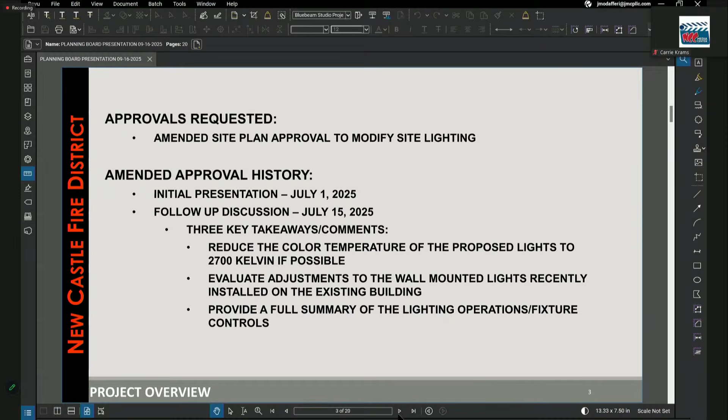Can you tell us what we had approved in terms of the number of lights for the site at that point, including the extension? The number of lights, so this plan included I think it was 7 or 8 pole mounted lights. The number of pole mounted lights has not changed since the previous approval.

We had 3 lights above the truck bay doors facing Memorial Drive, 1 light facing King Street above the truck bay doors, 2 lights mounted on the wall at the front along King Street for the proposed expansion, 1 proposed light over the existing truck bay of the existing building. Actually 1 proposed light over each of the existing truck bays, and then 4 lights over the back on the existing building.

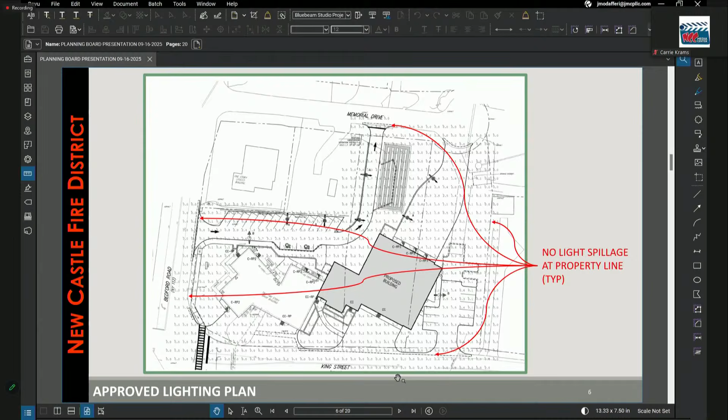So 1 here, here, here, and here. And then when we came before you in July, we had the amended approval where we had proposed some lighting amendments.

That included some lights that were now existing on the building that were installed after the start of construction by the fire commissioners. And those are 5 lights along the back of the existing building here.

We also incorporated some lights on the building here at the man door entries, and then I guess another light here at the man door and another one here at the man door, as well as we made 3 lights at the truck bays on King Street, as opposed to one that was there before.

We also proposed not to modify any of the lights along the front of the existing building. Basically, the existing lights on the firehouse would remain. The result of this plan was that we had some minimal light spillage at the back of the property here facing the utility substation, and then a little bit of light spillage on Memorial Drive here.

So if you'll recall, one of the other changes we made was the pole-mounted fixture that was approved in 2016 is no longer available now with the cutoff on the back at the property line. So if we installed the previously approved lights, we would have spillage over the property line from the back of those because the mechanisms in the fixture that we proposed was no longer available.

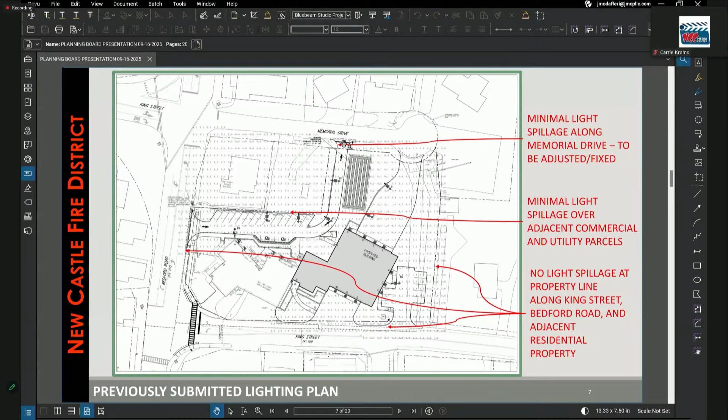Which light was it? Which pole mounted lights? All of them? All of the pole mounted lights, so we switched from the approved flex style light to a more utilitarian shoebox style that you see on other sites such as the Walgreens across the street.

I need to sign in, there we go. Still here, good.

The major part of the adjustment was that, did I lose connection to the Zoom? Looks like you lost my connection. You're no longer connected. Yep, I'm going back in now. I'm no longer connected to the internet at all. What happened here? Apologies. Why do I have no internet? Looks like I'm back in. Open. Okay. Join.

If you can go to the next slide also. And we had, turn this on too. So we previously had these two light fixtures that have now been replaced with this light fixture.

So the light fixture on the top is the light fixture that was installed by the fire district just after construction started. That is the one where, from the face of it, the light shines out as opposed to down. So that was throwing light over the property.

The one that you have there in the middle, that you're pointing to with the blue arrows, is that it's parallel with the ground? Yes. And there are brackets that hold it in that position? Yes, that's correct.

Okay, so it's consistent with the one we were proposing on the rest of the building. But we were going to keep this one and replace that, but although the board didn't say that we had to go to 2700 Kelvin, we also changed the plans to go to 2700 Kelvin across the board. So this fixture at the bottom here was not available in 2700 Kelvin.

So we changed all of the wall-mounted fixtures to this fixture here, including the ones on the existing building. Everything's correct, been changed. So by doing that, that eliminated the light spillage over the property line there.

The only ones that aren't, well, I shouldn't say all of the pole-mounted fixtures, wall-mounted fixtures are changed to that. There are really ceiling-mounted fixtures at two of the doors that have an overhang that will have a recessed light here. And then this light here, the wall-mounted one in black here, is the one that will be placed over the truck bay doors facing King Street.

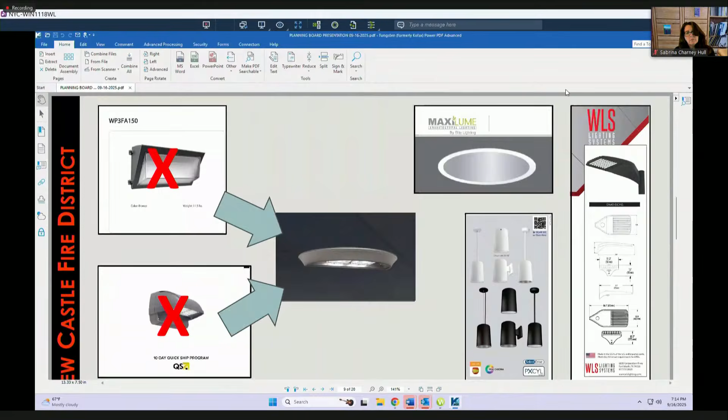So the first one is the B fixtures, which are all the pole-mounted fixtures circled in red. Those are to be controlled by a timer that will turn off at 10 o'clock, going from dusk to 10 o'clock, and then by motion sensors after that for emergencies, if somebody drives through the lot.

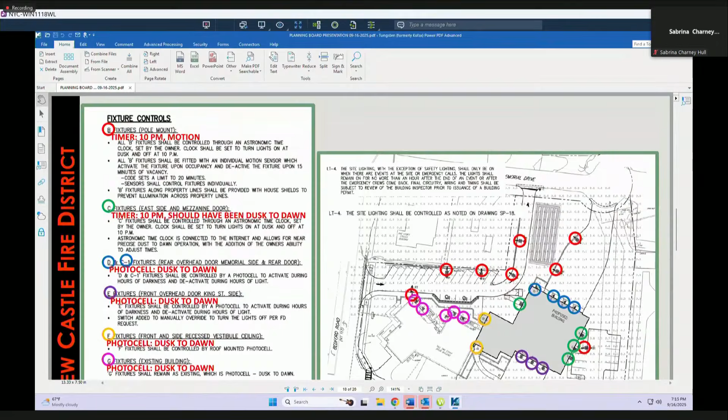Fixture C, which is the lights on the easterly side of the site in the green circles, and the one on the westerly side of the proposed expansion, those are also shown to be controlled by the timer till 10 o'clock on the plans, but that was a mistake on my part. Those are intended to be controlled dusk to dawn, and I'll get to reasons for that shortly.

The D and C1 fixtures on the back of the building facing Memorial Drive are intended to be photocell dusk till dawn, as well as the three light fixtures in purple over the truck bay doors at King Street. The F fixtures, the two underneath the canopies, the recessed lights, again photocell. And the five existing fixtures being replaced with the new fixture we just talked about are again photocell dusk to dawn, just like the ones out there right now.

So essentially, for safety purposes, we've proposed that all of the building mounted lights be dusk to dawn for protection. Now there was a comment from Sabrina asking whether some of the lights could be on motion sensors, specifically the three lights over the truck bay doors and the three on both sides of the building.

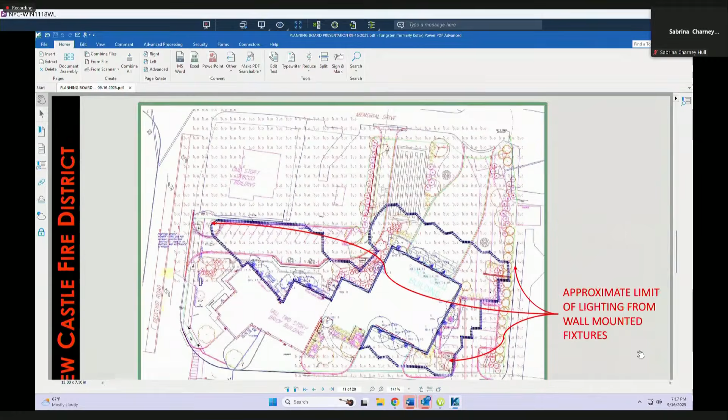So I think that's the next slide, Lynn. What we looked at first is this slide, which shows all of the building mounted lighting currently on the plan. The blue line around the numbers is essentially the approximate limits of the throw of those lights, without the pole mounted lights.

So the closest zero that we had to any of those lights shows where it is today, where we would propose to do the dusk to dawn lighting. If you can go to the next slide, please.

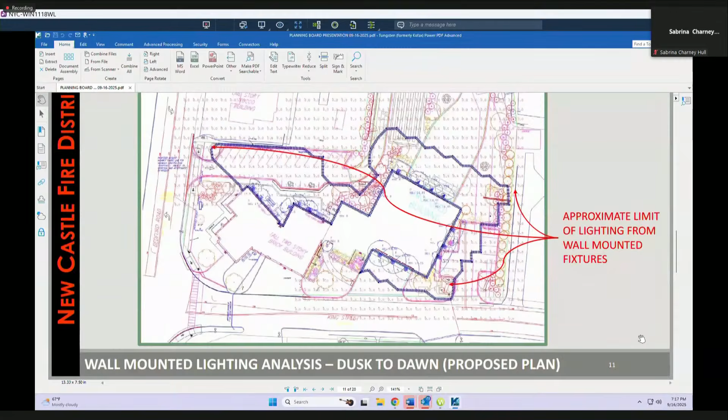So this plan, you know what, leave that one is fine. The plan on the lower right shows where we can take the lights over the truck bay doors and make them motion sensor only, which would reduce the dusk to dawn lights to what you're seeing on the right.

So that's a comparison of what we currently show on the plans and what I've talked to the fire district about, taking the lights over the truck bay doors and making them motion sensors, so they would only come on when somebody walked by them, drove by them, whatever.

Now, all of the lights, other than the five on the existing building being replaced, all the lights on the proposed building that are mounted on the wall in this scenario on the lower right are at man doors where people would walk in. So that's the safety concern for us.

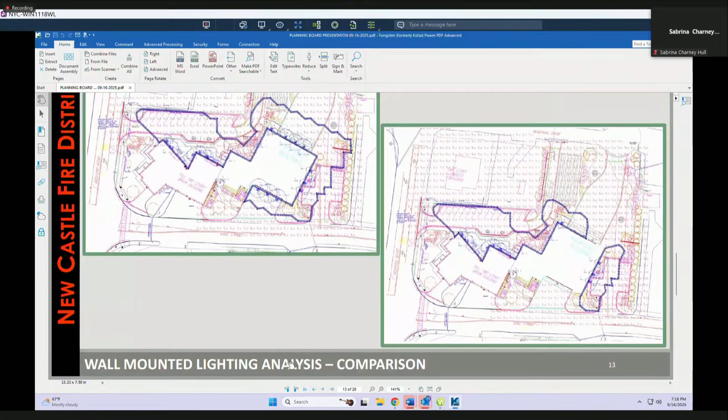We want those lights on dusk to dawn so that in the event somebody needs to get to the door, they can see where it is, they know where it is, they're not walking up to it with a motion sensor. If for some reason the motion sensors don't work, they can at least get to the door and have a light on if they have to get into the building with their key fob or key or however they're going to do that.

And there, for example, three doors on that eastern side, or southern side? Yes, those are actual doors, so we'll get into more of that question a little bit later. Next slide, please. They're mounted at about 8 feet — I believe those are right above the doors, basically.

So we were also in receipt of a comment letter from Mr. Carlock, who's here tonight, and wanted to just go through our responses to some of his comments. If you look at the northwest corner, the existing building, basically where those five lights are that were in question back in July, he made some statements that we want to clarify.

His first statement was that the five high-intensity lights on the existing building are to remain, and these should be removed. Again, that's not a true statement — I just said we're going to take those high-intensity lights and replace them with lower-intensity lights. He also stated pre-existing lighting on the existing building was to be removed as part of the approval. That's not a true statement either; the original design was to basically supplement the existing lights on the building.

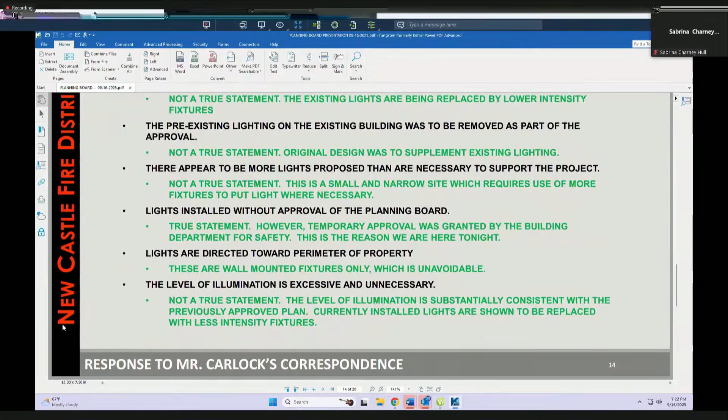This is a transition zone, so I think it's important for us to understand what's going on with these pole mounted lights, and maybe there's some solutions there. Since you're proposing to have these on until 10 o'clock in some cases, I guess one other question would be, what are the lumens on the all-night situation at the site? And then when you have the poles that turn off after 10 o'clock, what do we have between dusk and 10 o'clock in terms of lumens?

Do you have a sample though of the pole lamp that you're gonna put on top of the pole? They were provided with the submission package back in July. Okay, so there's no change with those. No, in other words, no.

As I understand it, they're directional. Yes, so they are directed — there were some comments made about a house side shield, which is sort of a generic, old school term, where with the LEDs it's an internal system that throws the light away from the property line. So all of the pole mounted lights are controlled with that type of system.

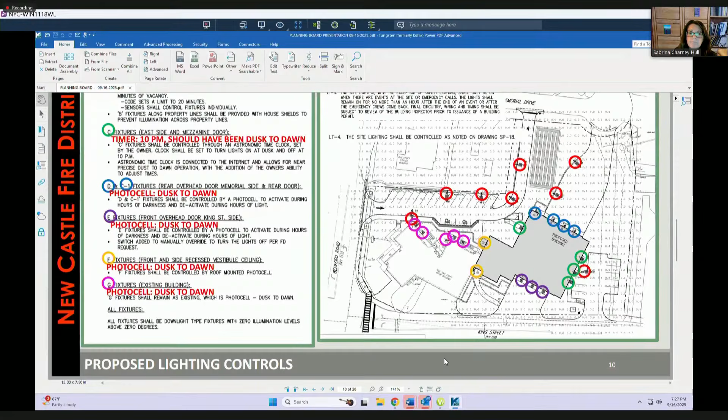Because it's a town-owned easement, we can't put fixtures in it. We can put in curb and landscaping. So your drainage sheet flows out of - have you not seen that? Well, you have a drainage easement, I'm saying you have pavement there, right? Yes. So is the water sheet flowing toward the building, or do you have any catch basins in that corner?

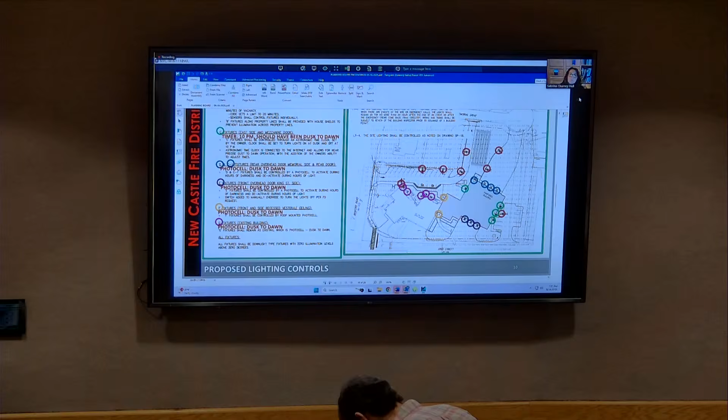Over here, yeah, on the right side, where you have that parking lot that's in the easement. So you already got permission from the town to put asphalt. My question is, for that area, do you have any subsurface improvements different from the mounting needed for the light pole fixture? I believe it's just the town sewer and town storm within that area.

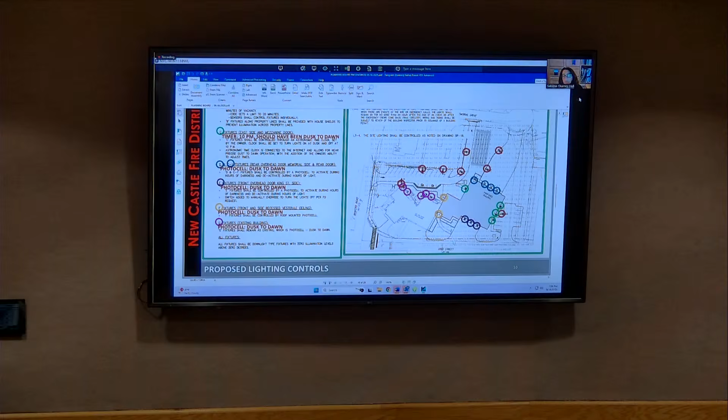I can double check and look, but has the question been asked of the town if it'd be okay to put a single structure in that area? I don't know how deep the line is, but we're talking about a single concrete base. I would have to check the easement - this is Lynn Whiting - but I don't think you're allowed to put anything in it. That was my understanding as well.

So there's a possibility, though it doesn't sound like that question has been asked. That there was - it was asked and discussed in 2016. Okay, I wasn't here in 2016. I understand. Chairman? Yes, Bob? Can I chime in on something here, please? Sure, yep.

It seems to me it's critical if there's a pole there - I would recommend at this point that someone reach out to the Commissioner of Public Works, who makes the final say. That would be Bart Carey, on whether or not a pole and electric conduit could be put in that easement. He's the one who makes the final decision on anything in the town easement, so it might be worthwhile to do that if you feel it's necessary, Mr. Chairman. Well, I think it would be desirable from the standpoint of mitigating the impact.

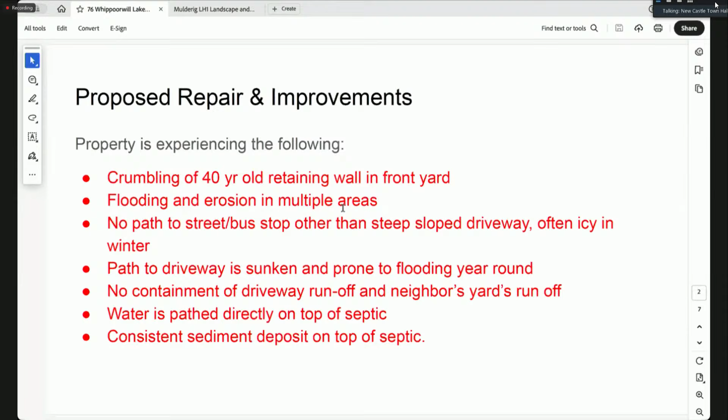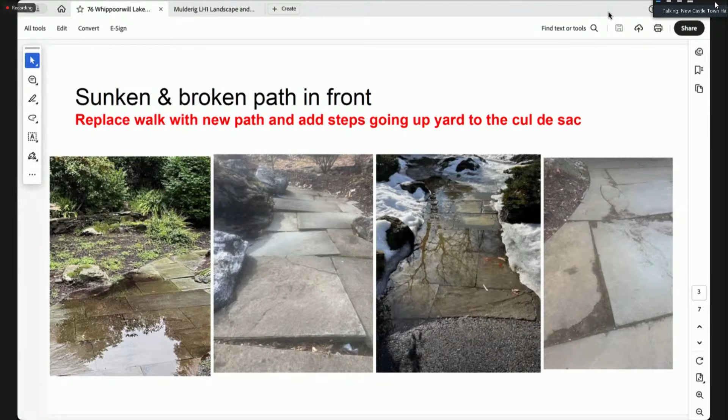There's no real containment for that water that runs off the driveway at all, and it's basically pathed to the septic and then down into the wetlands. So these are just some pictures here - walk, crumbling, sunken, flooding. The wall, which we're proposing to replace at exactly the same height, needs to come down - there were roots pushing in on it, it's tilted forward, it needs to be completely taken apart, but it is all under 24 inches.

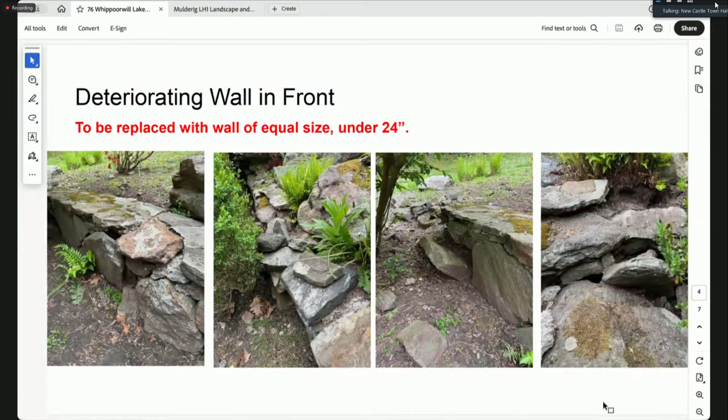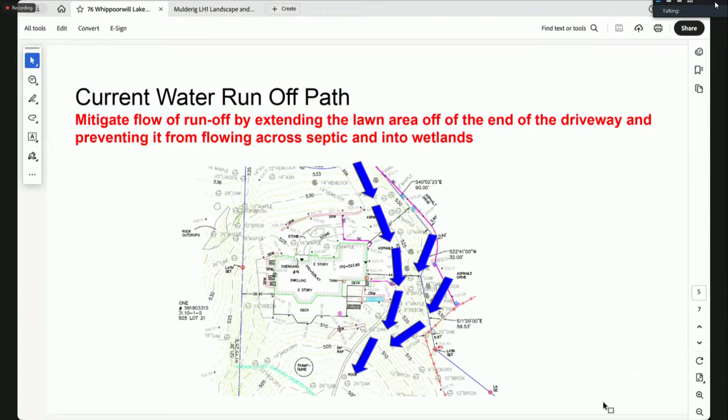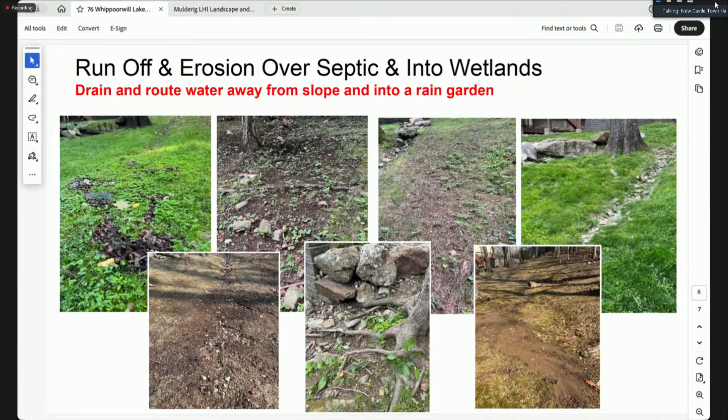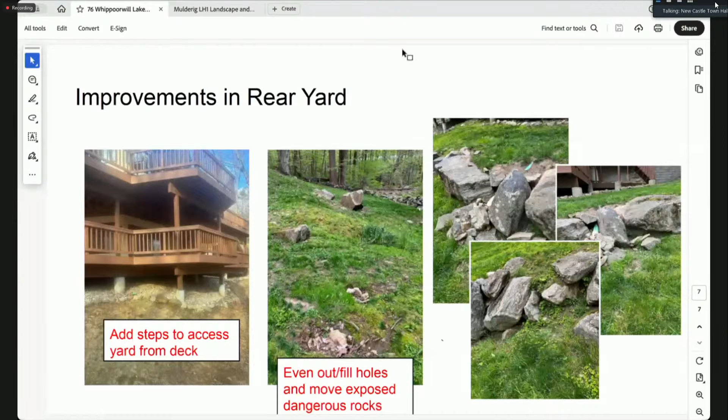And that's a little bit of a summary there. Nick, I'll turn it over to you.

Thank you, Jason. Will I be able to share my screen? I have a set of plans I'm going to show. Yep, I'm not sharing anymore, so you should be able to. Okay, great, thank you.

In addition to what Jason just spoke about, I wanted to bring your attention to sheet C-3 of our erosion and sediment control plans. The improvements consist of adding a retaining wall at the end of the driveway, regrading the side yard area so there's not as much slope, and regrading some areas in the eastern side yard and rear of the yard. We're trying to grade this area so the excessively steep sections become more manageable, aiming for a 3-to-1 slope throughout that steep area.

In addition to that, we'll be providing drainage behind the walls that will discharge to an energy dissipator in the rear yard, which should take away some of the runoff that comes down the driveway.

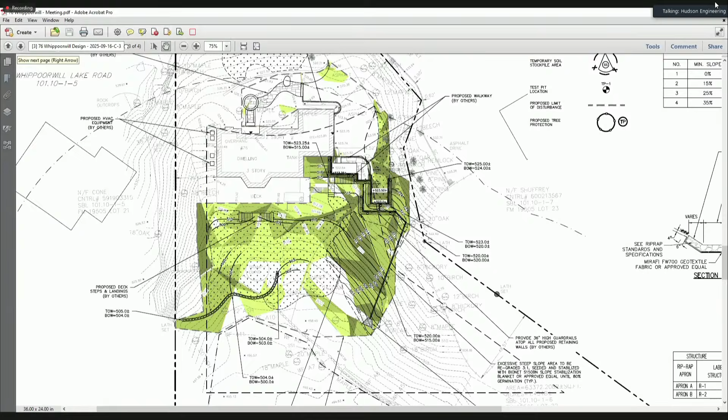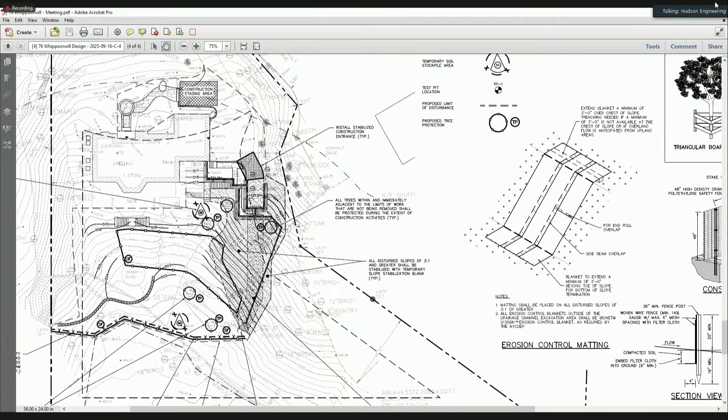As far as access to the rear yard goes, we're going to put a stabilized construction entrance at the end of the driveway, and we'll hand-build a path down the steep slope area to provide access for any material, workers, or equipment needed to complete the work in the back.

Once the grading is completed, we'll implement seeding and install erosion control matting all along this area to help stabilize it and ensure germination takes place. That will also help with some of the erosion that's been happening in the rear yard. So all these regraded areas will be stabilized with matting.

We're providing double rows of silt fence in the rear yard to protect the wetlands just south of the areas of disturbance. We're also showing tree protection, silt fence, and construction fence around the existing septic area so it doesn't get impacted.

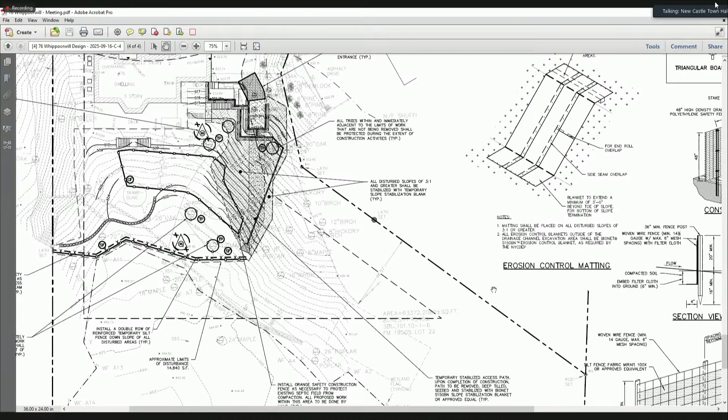That's about it. We did see that we had some comments from the planning board, including comment number 3 regarding the stream segments in the back there.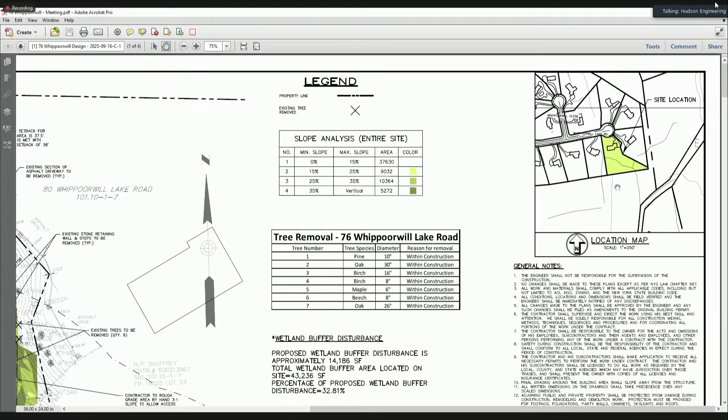So those are not actually streams - the actual stream is this line here in the back of the property. I think we've marked all the wetlands on the property and updated the plans to show the 150-foot buffer for the wetlands, which basically encompasses the entire area of our proposed work.

Unfortunately, there's no way to avoid that. So there is a fair amount of handwork that we are proposing to do to get access to the back and to ensure that we limit the amount of erosion that occurs while we work.

Okay, Sabrina, you had some questions or comments?

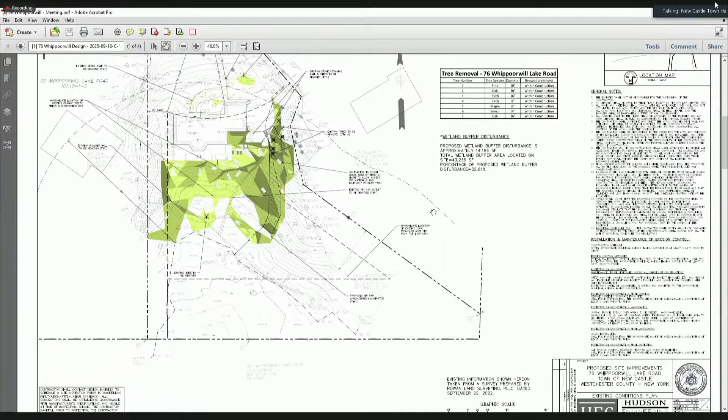Sure. For the board's information, this application is considered a Type 2 action in accordance with the State Environmental Quality Review Act, so there's no further environmental analysis needed in relation to that act.

From a zoning perspective, this lot is within a conservation subdivision, and when that subdivision was formed and this lot was originally created, the planning board dictated that residential R1A setbacks would apply. So even though it's in a 2-acre zoning district, this subdivision is treated as R1A from a setback standpoint. You should adjust your zoning conformance table to reflect R1A standards and make sure your setbacks, as indicated on your plans, reflect the R1A zoning setback.

I think it's really important that you label your wetland buffer on the plans, and for the off-site stream segment you pointed out that also has a buffer around it, it would be important to put that buffer around that stream segment to see if it goes onto this property, just so we understand what the lay of the land is.

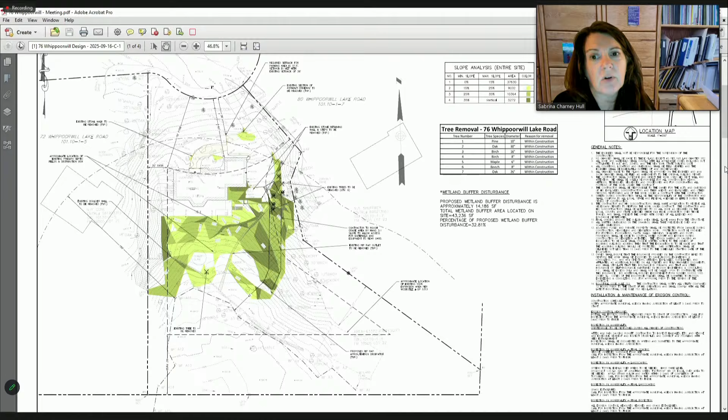The retaining wall at the end of the driveway, are you reconstructing that? Is that already there, or is it new? Part of it is already there, part of it would be new.

Okay, so zoom in just on it, make sure that area is also included. If it's not, make sure it's included in your development coverage analysis.

From a coverage standpoint, everything they're proposing is within the maximum allowable limits of both building and development coverage. Also, it may be helpful to make sure your neighbors' houses are identified clearly, you have one neighbor identified, and I'm assuming your other neighbor is the part of the house on the other side. Just make sure those are clearly demarcated.

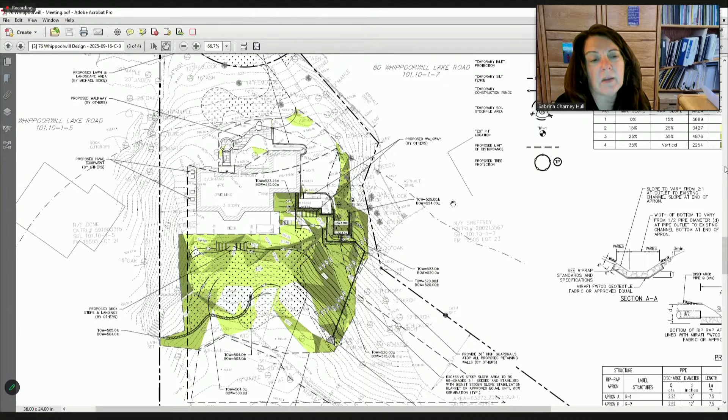And I think that's it. I do think a little more quantification is needed, and I think the engineer and the environmental coordinator are going to speak to that, but for now that's all my comments.

Okay, thank you. Jeff, do you want to speak about your comments? Jeff, you might be muted.

I think the board would like to see the weighted area calculations for steep slope disturbance. It's probably useful information. Even though we know they're above, there's just no calculation for it.

The retaining walls, anything that's got a greater than 30-inch drop will have to have guards around them, 36-inch high rails.

Take you out of the construction entrance, and then I'm just looking at your new drawing, and it looks like you put in, I don't know if that's some kind of a swale or something, an energy dissipator.

Yeah, so if I could speak to that. What is that? Yeah, so we did get the comments, and I did review them, had a chance to revise some of the plans based on the comments.

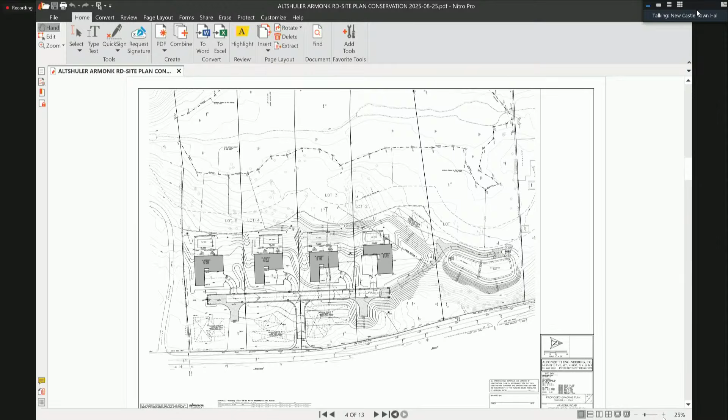So I think the board is pretty familiar with the site. The roads haven't changed, the building locations haven't changed, nothing like that has changed. We were just addressing staff's comments, most of them were pretty technical, most had to do with stormwater. So I'm hoping we can get this to a public hearing at this point. Okay, and I'll just open it up to questions. Great, any changes, all physical changes, or it's all the same? No real physical changes, I mean, the shed's gone.

What's that? The shed is... it's not gone. It's not gone. I know Dennis said he didn't see it, but I sent someone out there to look at it and he was on site and FaceTimed me, so I did see it. Great, it might have been just overgrown. What'd you do, I think it was a tree? So there were like four of us that couldn't find it. Right now it's kind of overgrown, definitely hard navigating that. I come home with bloody legs from time to time, but that's the way it works. Yeah, that area is pretty overgrown. Yeah, I can see how someone would miss it, so.

Okay, but nothing changed, I mean, some pipe sizes, pipe slopes, elevation of the basin, things like that. We did remove a number of retaining walls around the site. So I think that's it, that's the physical changes.

Good, Sabrina, you had some thoughts, comments? Mr. Chairman, I really don't have a lot of comments, they've satisfied pretty much all of my comments. The only comment I had was to make sure the plans indicate fencing around the stormwater basin. I did have a comment regarding maintenance of the stormwater system, but I think the deputy town engineer is going to address that, so I really have no further comments and I have no objection to sending this to public hearing if the board chooses to do so. Okay, thank you.

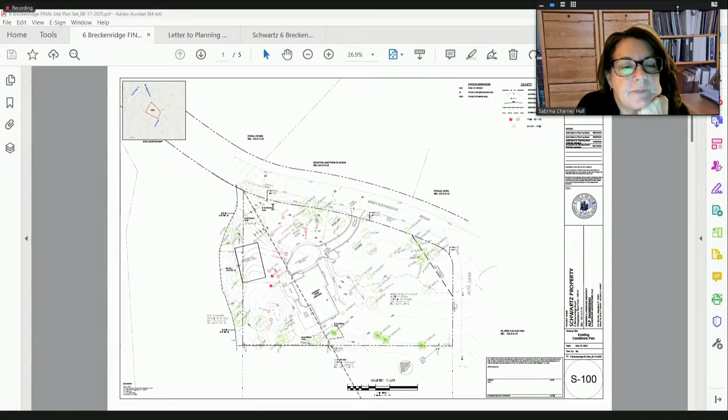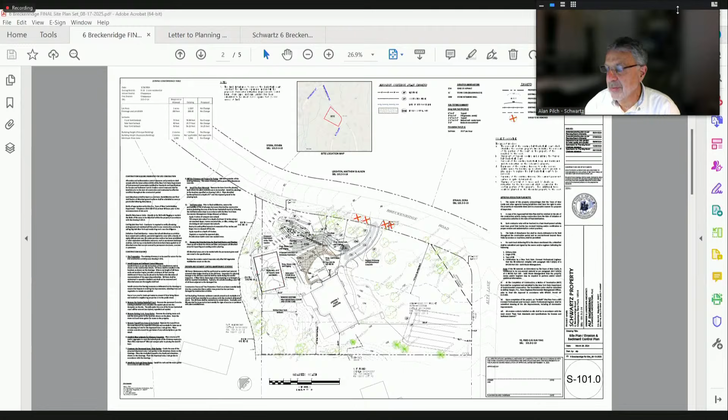This project involved a total of 20 trees that were determined to be removed without permits. It also involved construction of a half basketball court that straddled the property line. The plan involved removing the half basketball court in its entirety, expanding the driveway, putting in stormwater management, improving sight distances at the existing driveway, and an extensive planting plan.

Just to refresh everybody's memory, we had a resolution of approval back on September 10th, 2024, under which the work was to be completed on or about September 10th, 2025. My office did submit the final plans last November, and during the winter it was not the time to move forward with things.

When we reviewed the plans with the deputy town engineer, Mr. Scioli indicated he wanted us to review the sight distances at the existing driveway, which we did, and I believe we satisfied all the site engineering requirements. We have a contractor ready to move forward with the project who believes he's installed all the erosion sediment controls, so we're trying to move forward and get the work completed.

So that's why we were requesting this extension of time. In essence, to complete the tree removals that were actually done a few years ago without permits. That being said, we're just trying to complete the project.

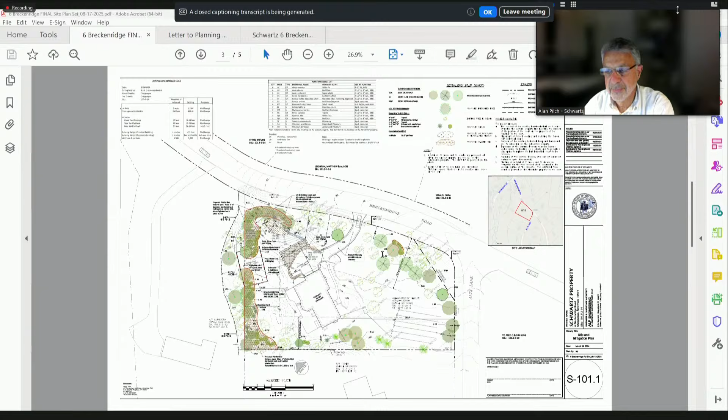Good night. Our next item is also an extension. This is for the Chappaqua Central School District, an application for a preliminary subdivision plan, steep slope permit, tree removal permit, and stormwater pollution prevention plan approval for Button Hook Road and Sabina Road.

Good evening, Mr. Chairman and members of the planning board. Kristen Motel from Cuddy and Feder on behalf of Chappaqua Central School District. We are requesting an additional 6-month extension of time. The last extension granted from this board was dated May 6th, 2025. We're asking that be extended until March 16th, 2026.

I've been advised by our client that the litigation that is pending is very, very close to conclusion. For what that's worth, and the records on that litigation are a matter of public record, we hope this may be the last time we're before you here for this request.

I'm happy to take any questions. We're not counsel on the litigation, but I am in touch with litigation counsel, so I'll answer them to the best of my ability.